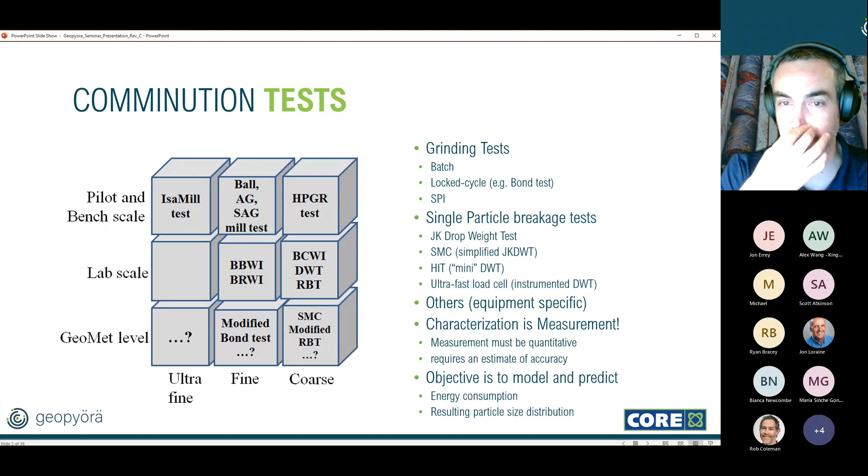Without further ado, I'd like to start with an introduction about comminution tests in general. There are different scales of testing - you can go from a pilot scale test or a bench scale test to a lab scale test, and then at a very small scale, a geometallurgical level test, thinking about the amount of sample you test.

There are different modes of grinding or breakage, from coarse to fine to ultra fine. We can group these tests regarding the breakage mode being applied. You have grinding tests that can be batch or locked cycle, and coarse grind tests, for example the SPI or SGI tests.

You have single particle breakage tests, which is the family where Geopyora sits in. There you have the JK drop weight test, the SMC, the HIT test, which is a mini drop weight test version introduced by Tony, and also the ultra fast load cell, some sort of instrumented drop weight test - a hybrid of a Hopkinson bar and a drop weight test that Professor Marcelo Tavares uses. There are also other specific equipment tests, for example for IsaMills, other stirred grinding mills, or HPGRs.

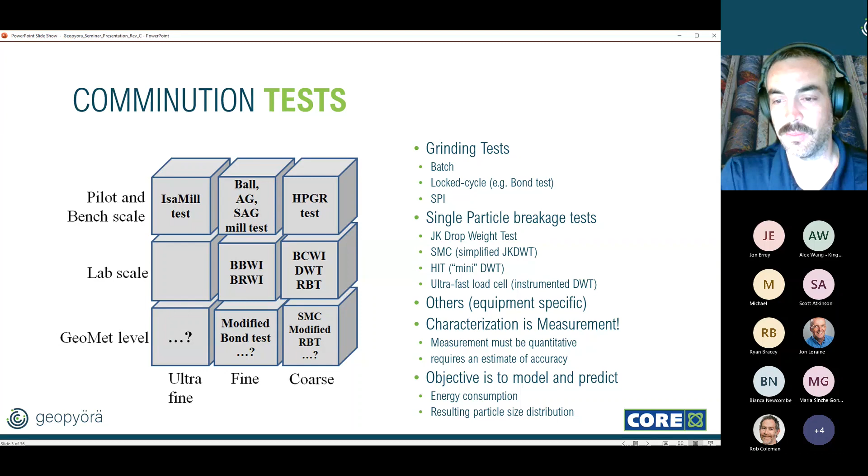But anyway, the main thing is that characterization in terms of comminution is a measurement. You need information to quantify, especially the requirement of energy consumption in the comminution process, because the objective is that you can model and predict energy consumption, and in some cases, if you have some sort of appearance function, understand the resulting particle size distribution out of a breakage event.

In terms of geometallurgy, the idea is to measure these rock property attributes - in this case of comminution, rock hardness - and map these into block models. But to do so, we need to understand that different textures, not only mineralogies, behave differently, and you need to test to understand how the different rocks will behave in a deposit.

So what distinguishes an ideal ore type in a geometallurgical sense? First, they need to have different characteristics, physical properties, and process response. If you test samples that behave similarly, you cannot group them differently. And when you find a group, let's say a geometallurgical domain, you would expect to find lower variability within that domain, for a single population.

Then you need to identify some geological properties for those groups, such as lithology, alteration, oxidation. Usually you can use multivariate data analysis methods such as principal component analysis to link these measured properties in a test work with other geological or geochemical properties.

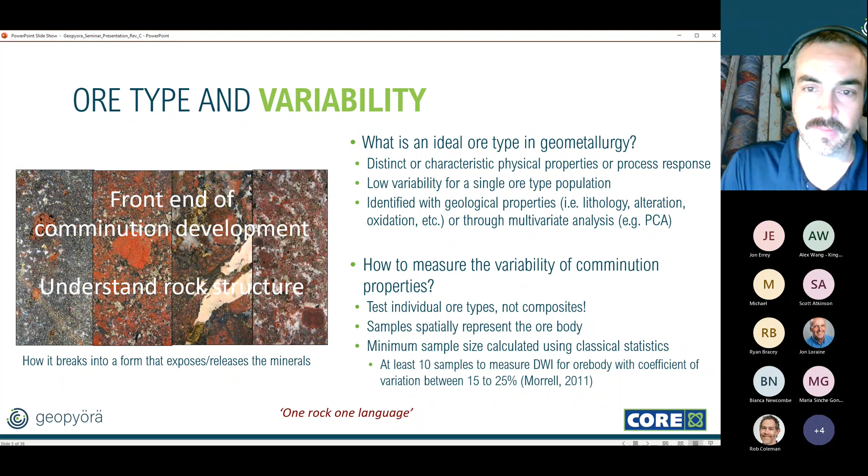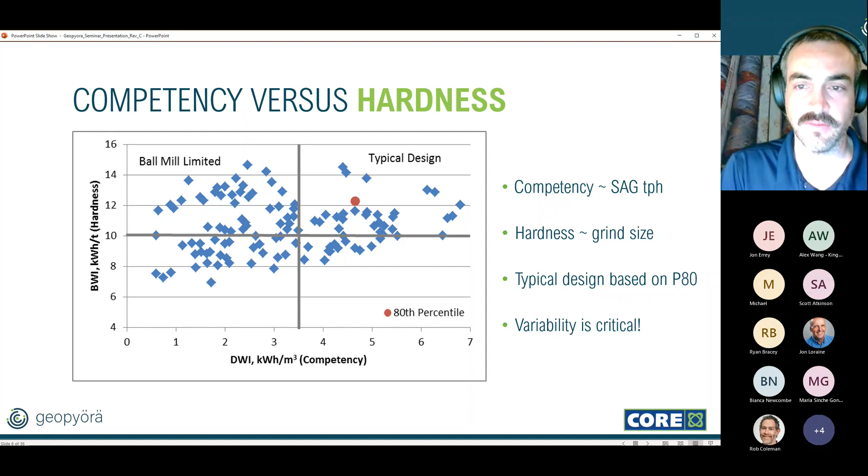In terms of productivity for the life of mine, that's how the whole vision and idea of the Geopyora breakage test came along, because we believe you need to understand this variability to assure productivity. That's our slogan. Now I'll make a pause to explain what Geopyora means.

For those who don't know any Finnish, the word pyörä means bicycle. A lot of my insights came from my passion for cycling around the world, and then it became logical to baptize the machine Geopyora, especially because it resembles a bicycle and uses two wheels to do the breakage test.

Coming back to why we believe we should test more - that's the reason why many projects fail. They do thousands and thousands of geochemical assay tests to mitigate geological risk, but they only do a few comminution tests. So they end up doing designs where there is a lot of uncertainty around throughput, around production, which means cost variability and also revenue variability. And that's a very high risk to manage.

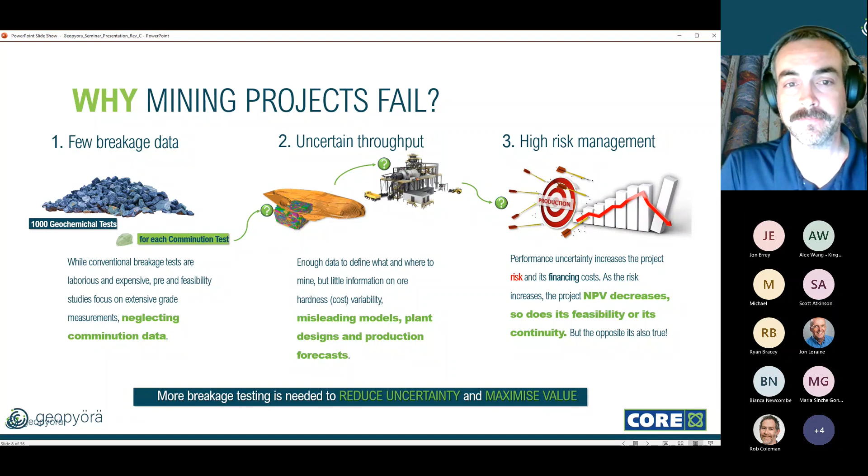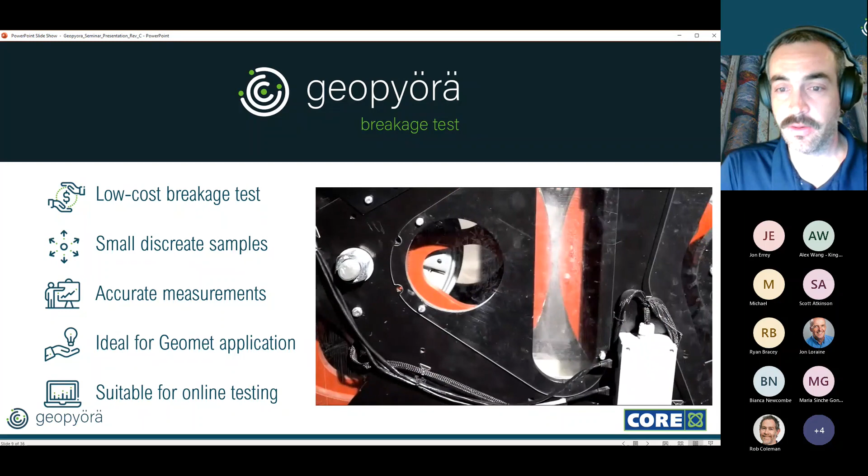You can lose NPV, lose the value of a project. So we believe that you need to test way more samples to understand this uncertainty, to reduce this uncertainty and maximize value. But to do so, you would need a low-cost breakage test, which tests small discrete samples, which can do accurate measurements, not average measurements, which is ideal for a new geometallurgical application and also suitable for online testing if you want to bring it to the field, which is what we are doing in the future.

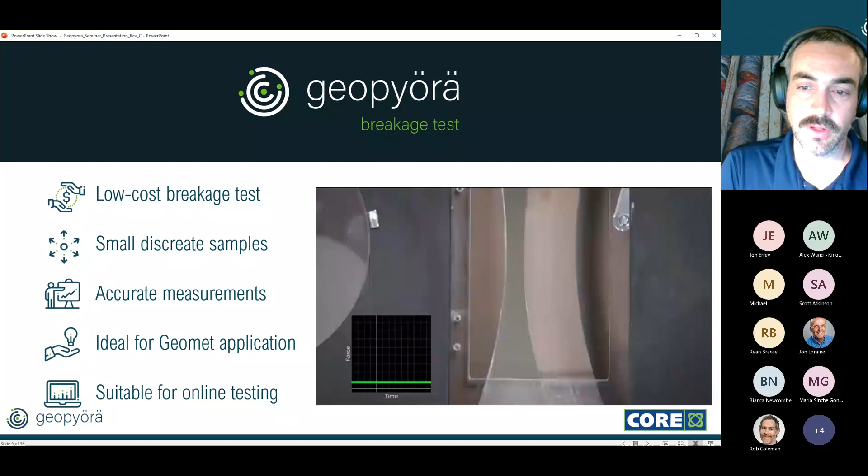And that's exactly what Geopyora is. We call it the ideal geometallurgical test. Now I'm going to show a little bit about the features of the device and the method.

Very differently from other comminution tests where they apply some nominal amount of energy and assume that everything is used into the breakage, ending up with some average parameter, in the Geopyora we measure for every single particle going into the breakage. Within the sample, we measure the force applied in breakage and also the energy absorbed by the rock.

We measure the energy by means of loss of momentum of the rotating wheels. So when each particle is fed through the gap, the motors are disengaged. The motors, which are gearless, don't have any mechanical losses, and then we can account very precisely and accurately for the amount of energy used in the breakage process.

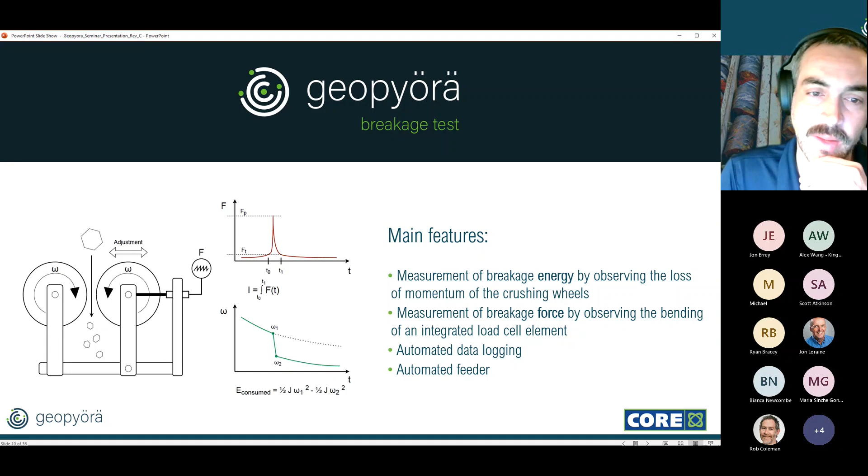And the force is measured by means of a load cell. So you have a very precise and accurate measurement of force applied, and the whole operation is automated, and very rapidly we get a distribution of results, which I'm going to talk about a little bit now as we go into some validation results we've been doing.

We don't get, as I said, an average parameter, an average value - our actual measurements are force and specific energy. So when you test a sample, you get a distribution of results. Here you can see results for 7 different samples, and without doing a lot of analysis, you can spot your eyes on these distributions and clearly see differences across samples.

You can clearly see, for example, that sample F, the purple one, is way weaker than, for example, the yellow one, the A or the B sample. And...

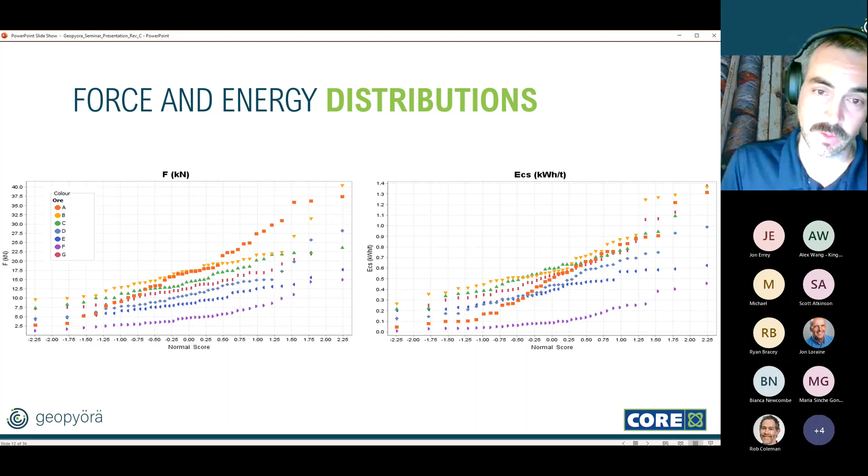But if you want to use these distributions to do comparative analytics, for example using statistics, for one single paired sample you can use a T-student test. For more samples, you do an ANOVA. And if it's hundreds or thousands, then you can do multivariate data analysis, as I will show later. The idea is that the distributions allow us to easily compare samples or group them according to their properties.

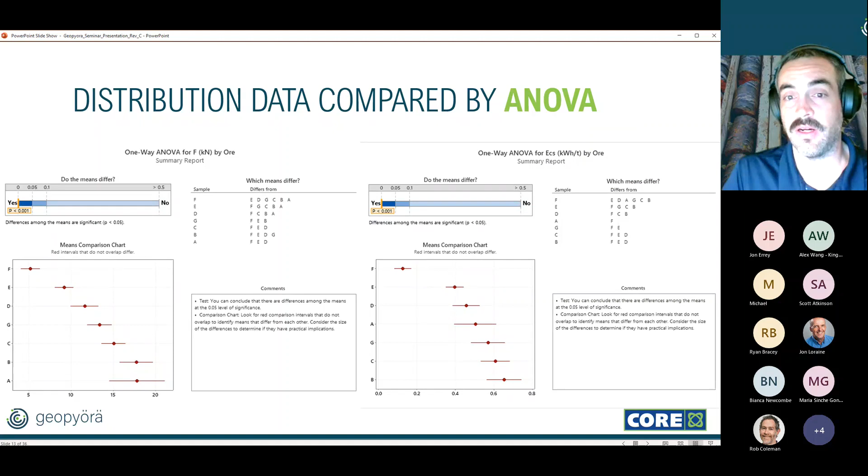Because, for example, if you do a drop weight test or a Bond test, you end up with one average parameter. Let's say you test two samples, you get a bond of 15, and the other sample a bond of 17. You ask yourself, are they really different? And you cannot answer that question.

Coming back to validation, the first big question we had to answer is whether it's a different breakage mode, whether you produce the same sort of fragmentation as the drop weight test, and whether you're actually measuring accurate energy. So the only way to do so was to test samples in our device at high and low energy levels, measure that energy, and send duplicate samples to a drop weight tester.

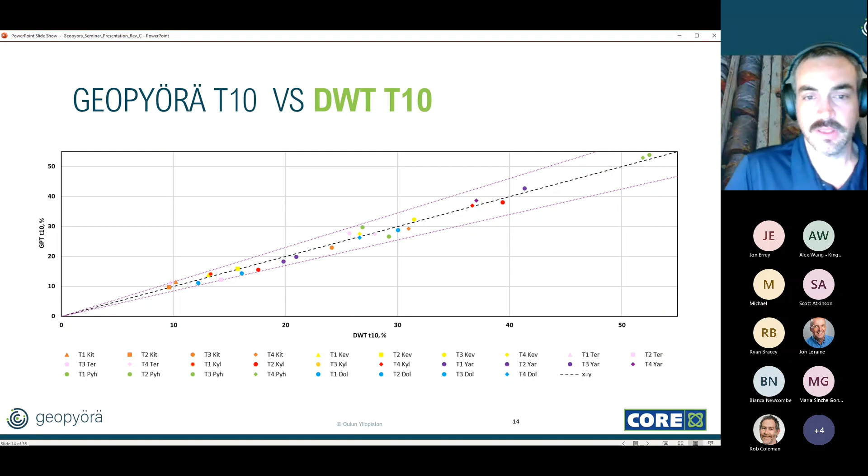Where the same average energy was applied to the samples in the drop weight test, and then we compared the T10. We are going to present this work about accuracy and precision at the upcoming comminution conference in South Africa and get a paper published in the SME Minerals Engineering Journal.

But then, we produce the same sort of T10 and measure energy accurately, but do it with much less points to fit the A times B curve model, the breakage model, which is this curve fitted to these points. The drop weight tester used 15 points, the SMC used 5 points, and we are claiming to do it with 2 points.

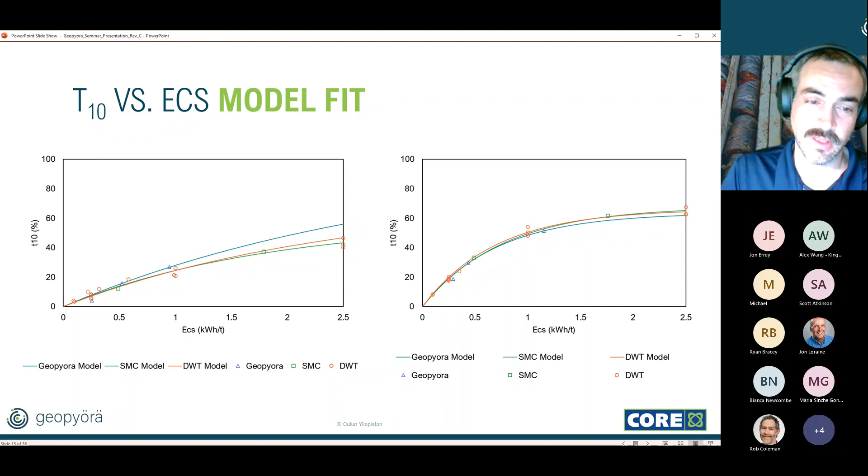And the answer was yes, we can. So here is our database up to date. We already tested nearly 150 samples that have been tested with SMC or drop weight test, and we have an A times B reference value for comparison.

We have a mean relative error of 9% and a parity R squared of 0.98. So we deem ourselves able to claim that we can reliably provide equivalent parameters to the drop weight test or the SMC test.

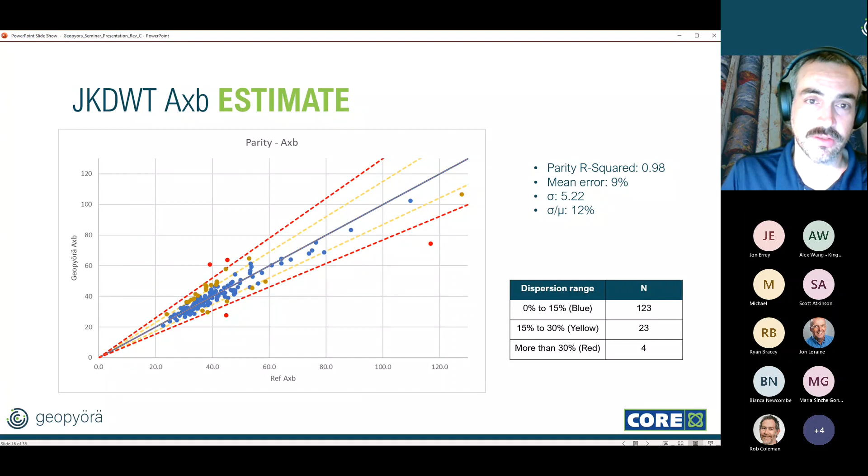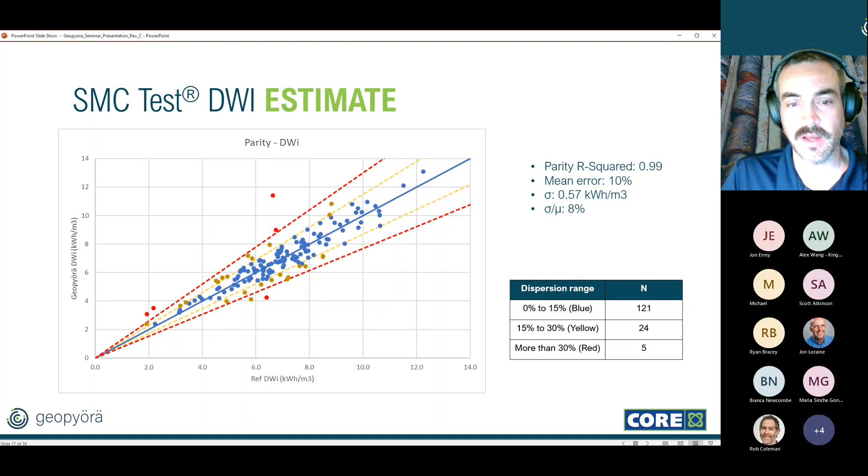And here's the drop weight index, which is basically the inverse of A times B multiplied by the specific gravity, which is also really good.

It has a strong correlation with the Bond work index test itself. We measured the energy, we measured the percent passing at that size during the product sieving, and very rapidly we can determine the Bond work index accurately and precisely as well.

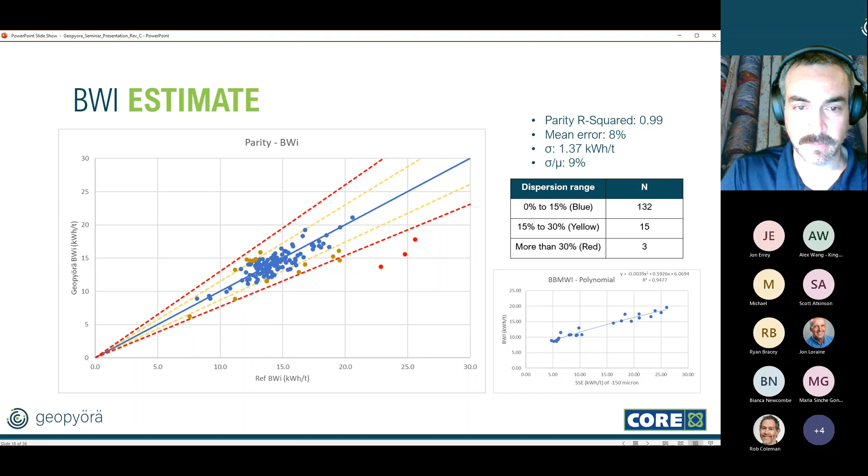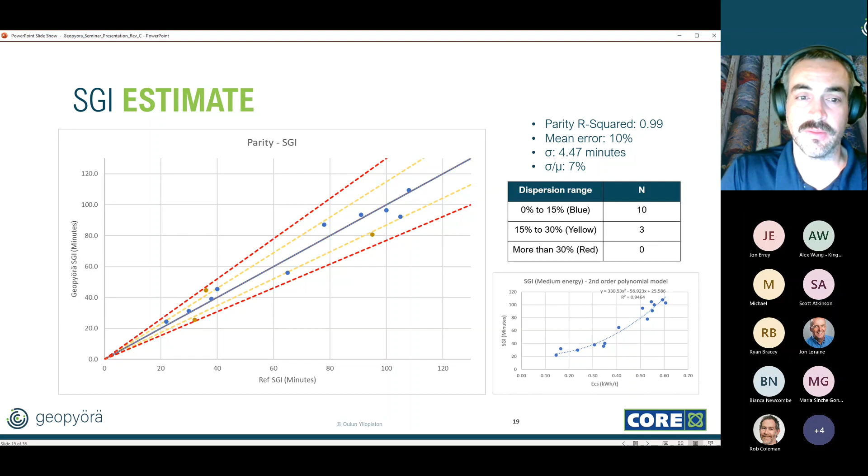More recently, we started looking at the SGI, which is an equivalent of the SPI test, a grindability test used for SAG mills, mostly used in North America and some in Chile and Peru. When doing work for Hudbay, they wanted us to give them the SGI. We very simply found a correlation between the specific energy of our test and the SGI minutes, and we could estimate the SGI for them as well.

One of our largest test work programs so far was done by Agnico Eagle in Kittila. They took a lot of drill core specifically for this test work program - more than 1.5 kilometers of drill core. We discretized the samples in the same intervals they were using for geochemical assays, basically every one meter section, covering all the different lithologies in the deposit. We got more than 1,000 samples tested.

On their side, they did geochemical assays by XRF, and in a few tests they did mineralogy by quantitative XRD. With that, we managed to develop geometallurgical models that can predict the comminution properties as a function of mineralogy. This work is due to be published, but that's all we can say for now. Very soon we'll be publishing the outcomes of this work, done at the University of Oulu.

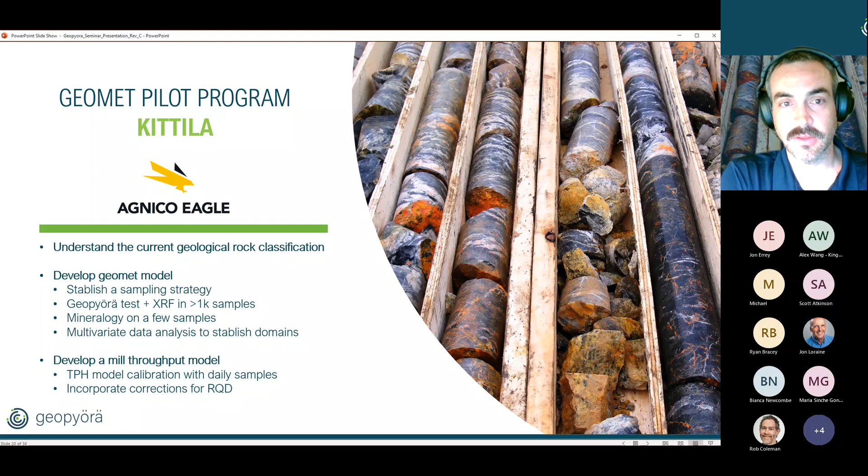And then in terms of other test work that we did, which was very interesting, was for another project here in Finland, the Sakatti project, which is an Anglo American project.

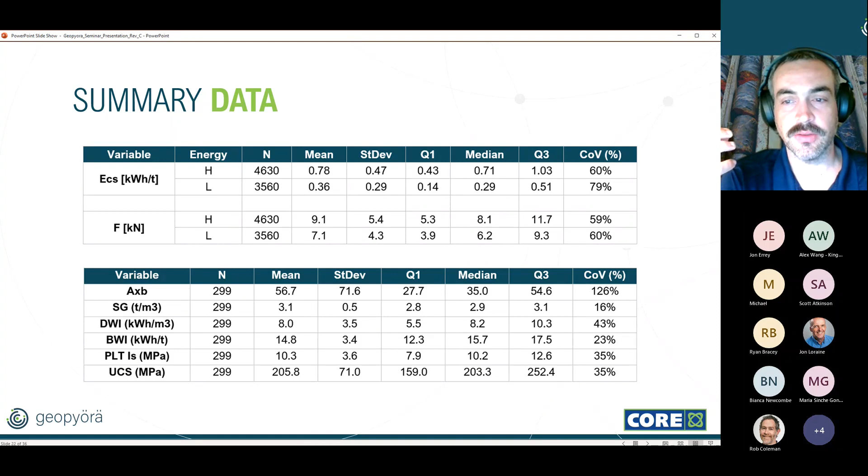We used multivariate data analysis with 12 dimensions of measurements that we did, and then we could group them into 5 categories according to their hardness. We then needed to check if these differences were statistically significant.

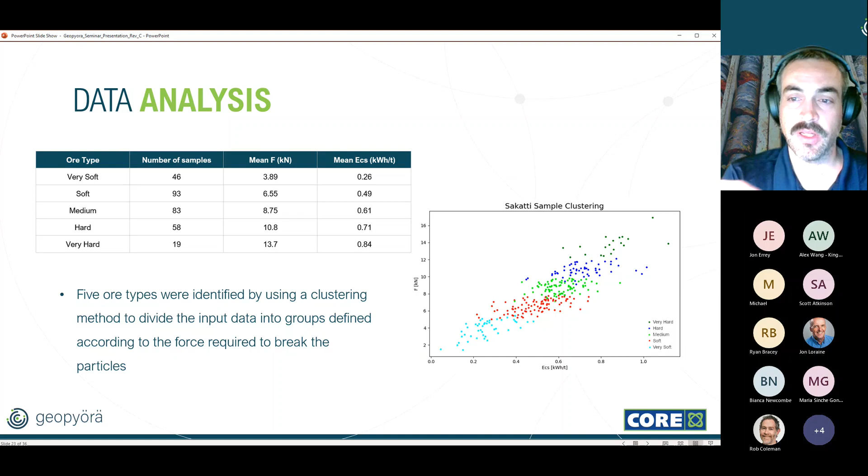So when the data was grouped, we did comparisons. We can see here the distributions of the energy and force measured for all the particles, these 8,000 particles in the population, and the distributions for each group are distinguishedly different.

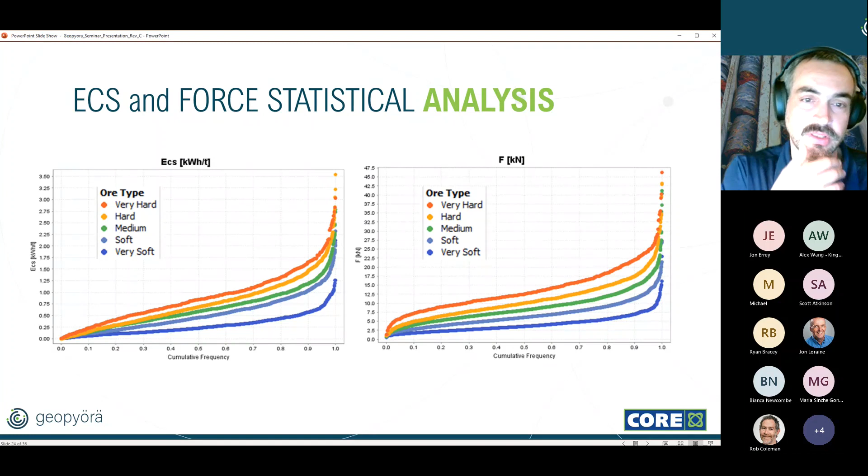But we needed still to test statistically, and by means of ANOVA we confirmed that the mean energy and mean force are different for each population, and we did the same for the comminution parameters of these 5 groups. We can confirm statistically, with 95% confidence, that the medium A times B of, for example, 35.2 is actually different from the hard one, which has an A times B of 30. This is the beauty of having large volumes of data and being able to do real statistics with it.

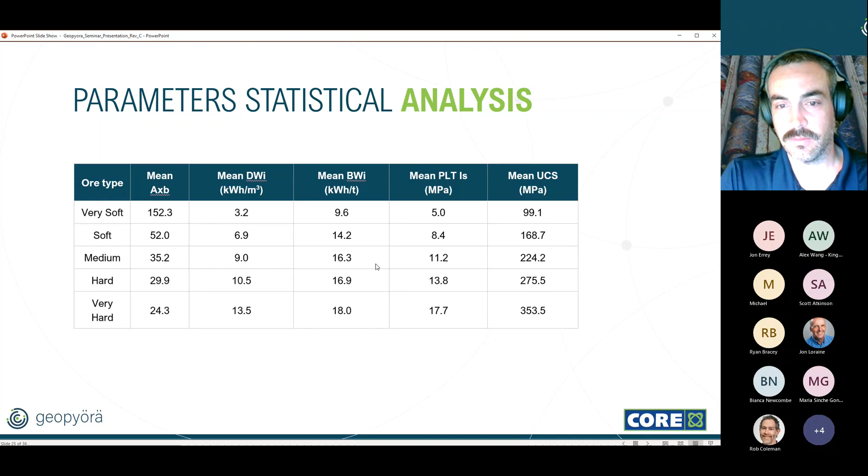A little bit about how we are doing business, now in partnership with Core for more than a year. We basically sell our services through mining companies, through licensed laboratories. Now we are with 5 different labs: one here at the University of Oulu, one with Core in Australia, one with UVR-FIA in Germany, one in Rio de Janeiro with Professor Marcelo Tavares, and more recently we signed a contract with Grind Solutions in the UK.

So we license the technology to labs or sometimes directly to mining companies, as we are pursuing now with Cobre Panama and also with Hudbay. When the tests are done, we do the data analytics and then issue a report with all the results, and we charge a service fee.

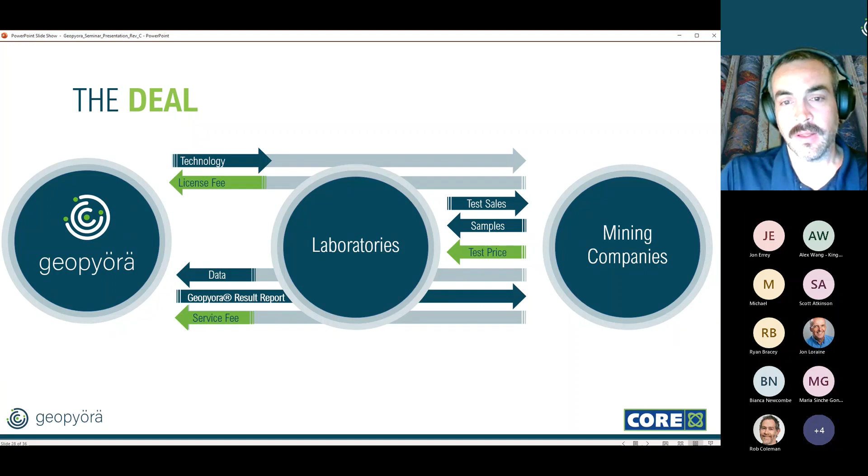Our pricing is important to mention. We decided to create a pricing model with a scale, to encourage customers to embrace our vision of testing more samples. We believe that the more samples you test, the lower the uncertainty around the hardness and the whole business. So to encourage customers to test more, we are reducing our margins as the volume goes up, and reducing the prices so that customers can take more tests.

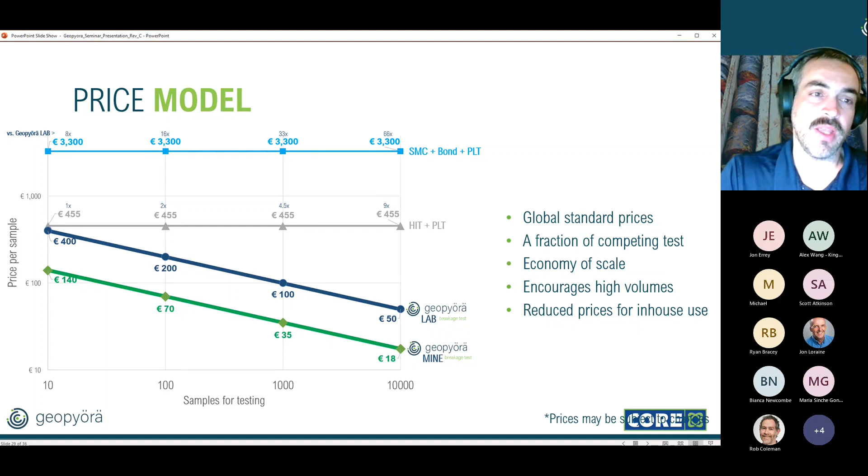Other tests don't follow the same policy — the more you test, the more you pay. And even for the HIT test, which is quite cheaper, if you want to get some geomechanical information together, you're going to have to do a point load test, a combination of tests to get the same sort of results that you get from us.

That comes into our value proposition, which is mainly get more data for your budget. With one test you're going to get impact breakage parameters, grindability parameters, and mechanical strength parameters. So you're getting way more value for the investment that you do in your test work.

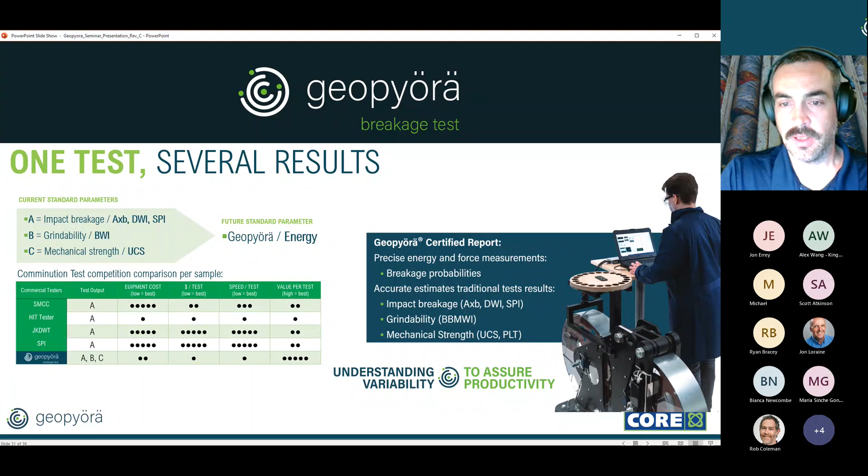The value proposition is that with more data, you can get up to 66 times more data with the same budget. You can use that data to unleash value in your whole project, by modeling those properties into the ore body and influencing the whole mine-to-mill value chain, by optimizing drill and blast for hard ore, by optimizing blending strategies, and increasing NPV in the whole project.

In terms of technology, we aim to stay ahead, firstly by means of patents — we have filed patents in 15 different countries, the main mining countries. We've already been granted a patent in Australia, and we are very close to being granted one in the United States, with others to come. We keep constantly doing R&D to improve the technology.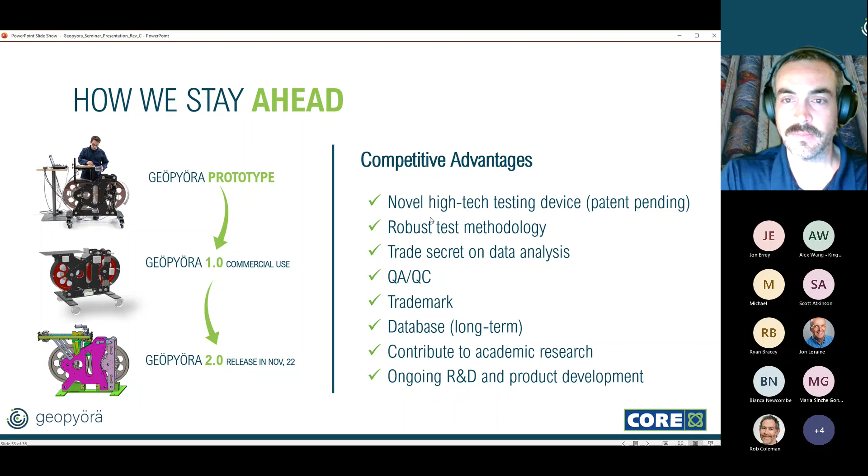We had a first prototype, shown in the first picture, and then we refined it into a 1.0 commercial version, the one Rob has there. Now we are about to launch a very new version, the 2.0, with a fully automated feeder, new software, new hardware, making the device much more robust and easy to operate. The idea is also to create value by building a database in the long term, which you can use for benchmarking and to provide data to train artificial intelligence models.

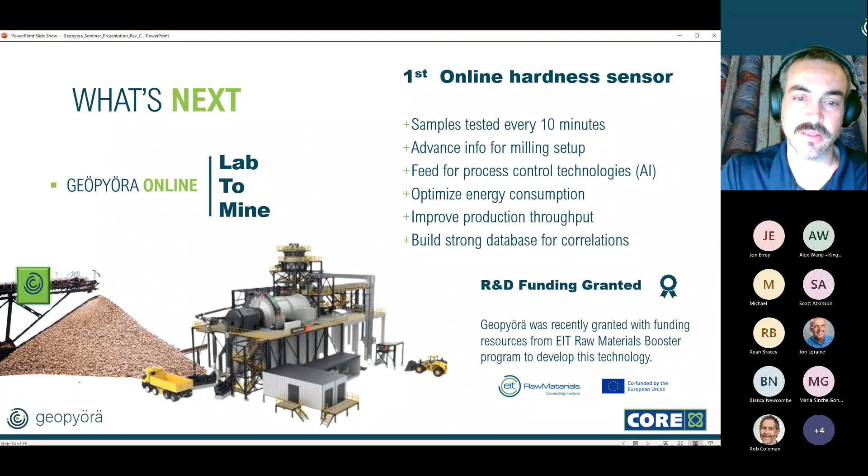What's the big next thing? We received funding from EIT Raw Materials recently to develop an online version of our product. We've been communicating with customers who had the intention of having the rock breakage properties measured online, meaning in real time. The idea is to use an automated sampler, get samples, pass them through our device, and generate data in real time to optimize the grinding process in real time.

Our team is quite small still. I have myself as CEO, Malcolm is acting as CTO, providing advice on the technical developments we are doing. I have Ronan, my partner, looking more at the financial and operational side of the business, and we have two interns: Thiago is an engineer and Beatriz is working the business side together with Ronan.

So some conclusions: we have a rapid, simple, safe, low-cost way to do breakage tests, which can do precise energy and force measurements, and measurable differences in consumed energy and applied force. We can accurately predict the parameters from drop weight test, SMC test, and bond SGI test, and now we are doing further work to validate the estimation of our compressive strength values, and also developing the online testing technology. That's what I wanted to present to you, and I'm more than happy to hear your comments and address any questions you might have.